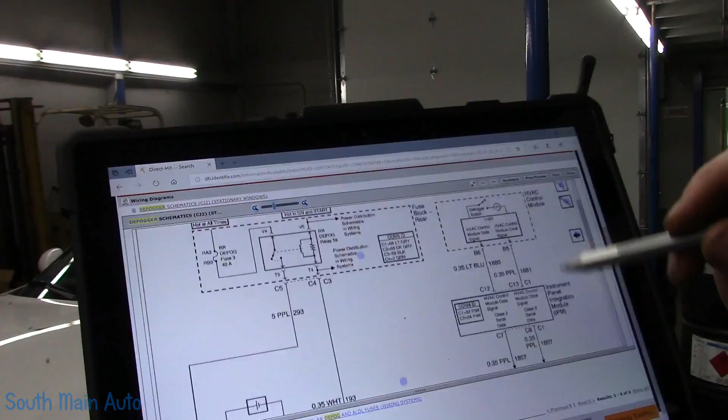So looking on a diagram here, hopefully I can share this with you folks. I decided let's just look at the rear defogger, just because that's what I said. So we have a rear defogger relay, we have a fuse—just trying to get an idea where we're going to go with it. And of course this is the rear defogger grid back here.

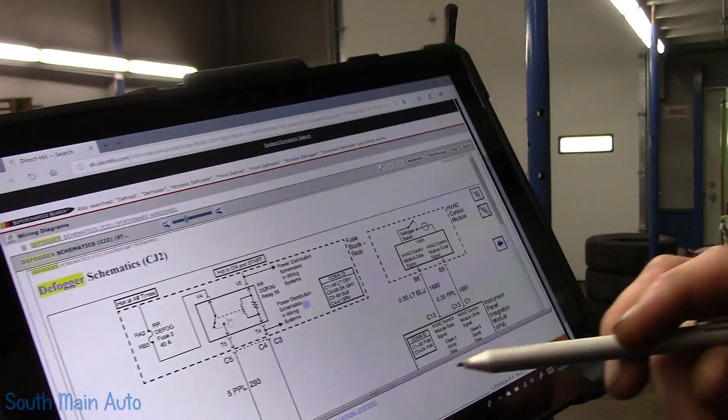Needless to say, in order to turn this relay on—because I doubt we're going to find a fuse problem, since I doubt all these run off the same fuse—that's just something going in my gut right now, just trying to get an idea. In order to turn that on, it's turned on by the rear integration module, or the RIM.

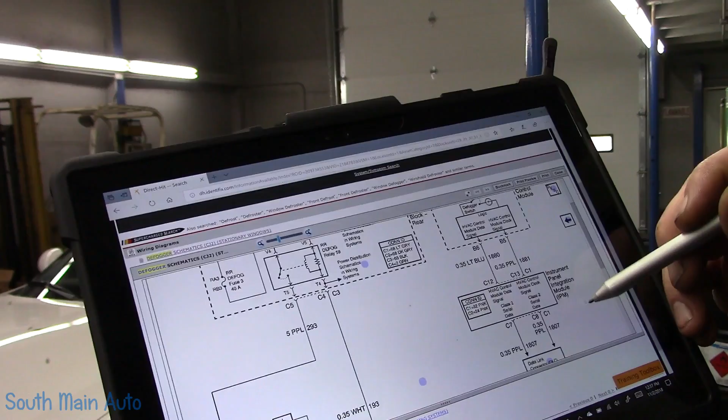So let's start at the beginning. We push the button here on the rear window defogger, and that sends a signal to the instrument panel integration module, and from there it sends a signal to the rear integration module, and then the rear integration module turns on the relay, and well, the rest is history.

So being that works off a module, I say we take and grab a scan tool real quick—see, because it looks like we might need some data, see if it's even receiving that input, and then we'll do all the rest of our checks here. Wait for the scan tool to boot up here.

Wait for that dinger to quit dinging. Quit dinging, you ding dong! Oh, there it goes—let's close up there.

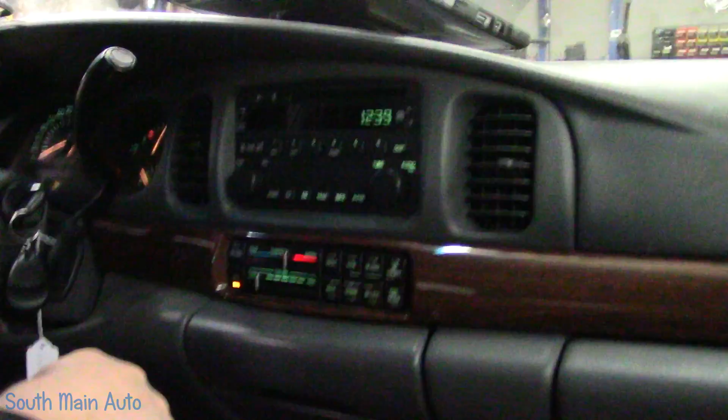Mrs. O's making some noise in there. So the power windows work—let me get them up. Ooh, that didn't sound good. So that's the lock/unlock button over here—nothing's happening. No interior lights up there. And I do not hear any clicking, but I also notice it does not light up either.

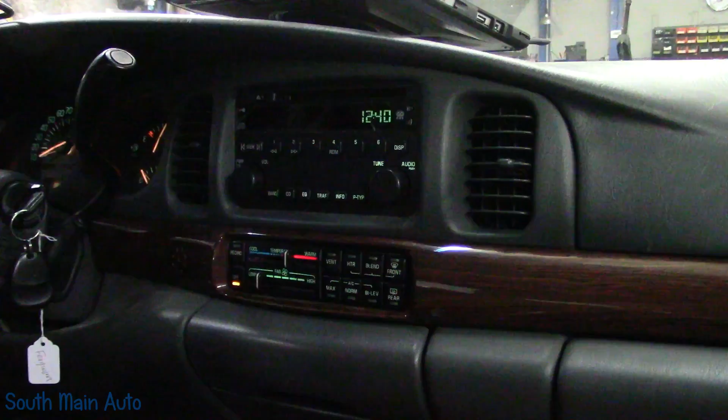So let's get the scan tool loaded, see if we can talk to this RIM, see if we can see any type of input, and then chase it down from that area.

So currently I'm just pulling codes from all modules, because let's say we have a no-com with something—modules will tell on other modules, so it's always a good idea to do. So I'll let this finish, let this populate.

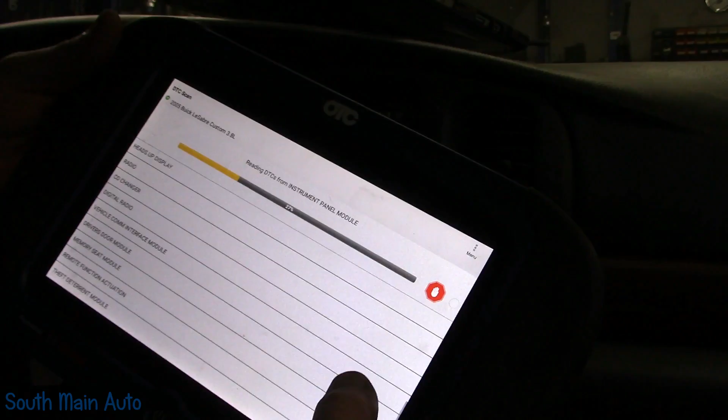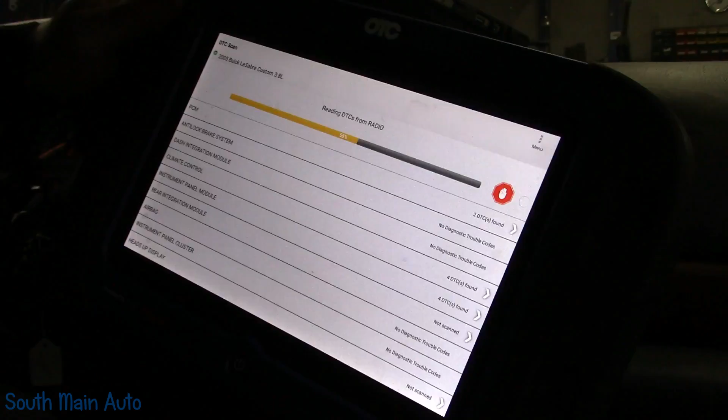So there are codes in the climate control module, so that's good. So, rear integration module—oh, you see that? Not scanned. I think that's code word for no-com. So that's pretty interesting. I wonder if all those other components that don't work also run off that module. I think that's on my list.

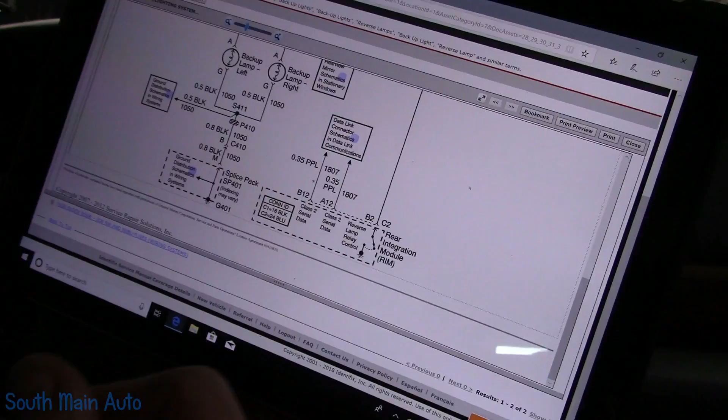Guess what? The reverse light control for the reverse light relay also runs off the rear integration module. Alright, so it's all starting to make sense now. What else did he have? We had interior lights, right?

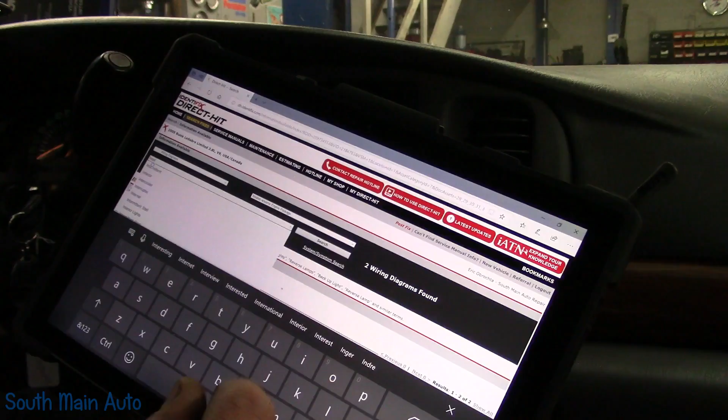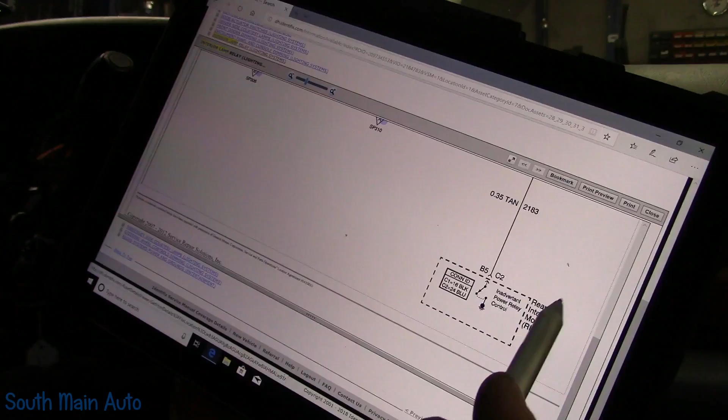Interior, I-O-R, interior lights. Hey, look at that. So let's just see what these little guys run off. If they're all the same, then we're going to change our interior lamp relay lighting system. Here we go, inadvertent power relay. Rear integration module. We're starting to see the connection now.

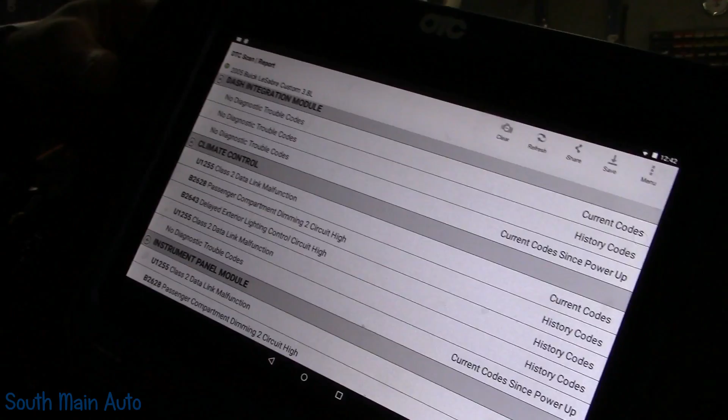I bet if we look up everything else, we will also find... Let's see here, we got some old history codes in the ECM. Current code, Class 2 data link malfunction. That is in the climate control. I wonder if that code sets if it cannot communicate with the rear integration module.

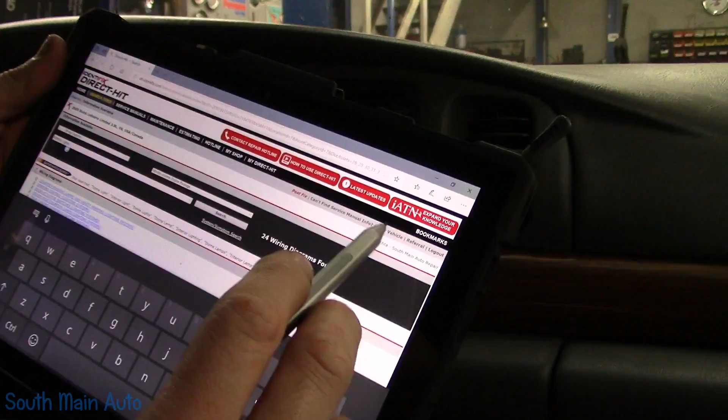I assume it had Class 2 data lines going to it. This is an old enough GM. Let's see here, where were we? Actually, I saved it in my bookmarks. Let me open this back up. Come on, bookmarks. Loading, defogger schematic. Let's see.

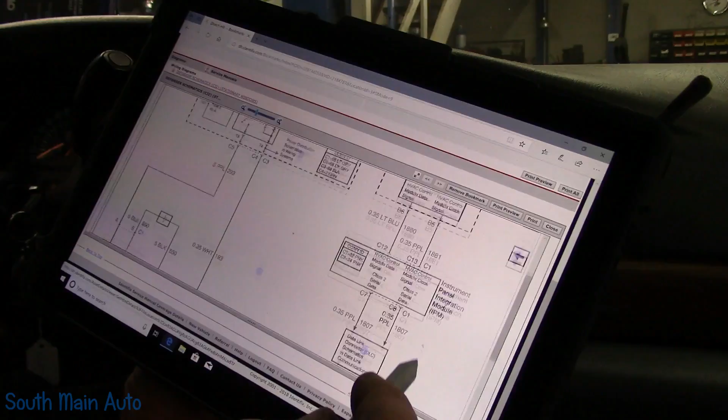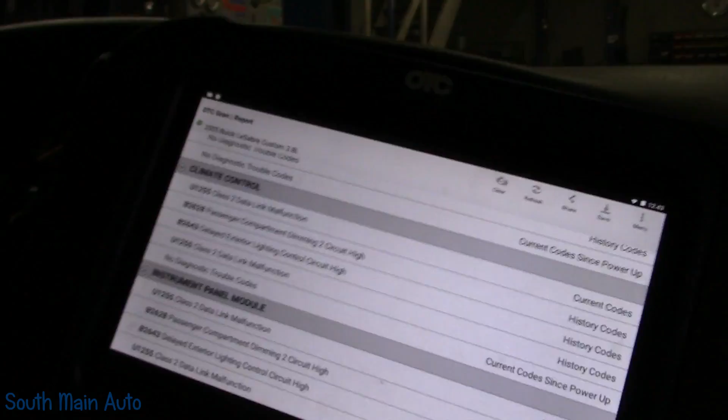It actually has two Class 2 serial data lines going to it from the HVAC module. So that's good to know. Instrument panel also has a Class 2 data line malfunction. And if we remember looking on our diagram here, it goes from the HVAC module, so from this button here, it goes to the instrument cluster, and then, right, is that what it said? No, I'm sorry, instrument panel integration module, and then to the rear integration module.

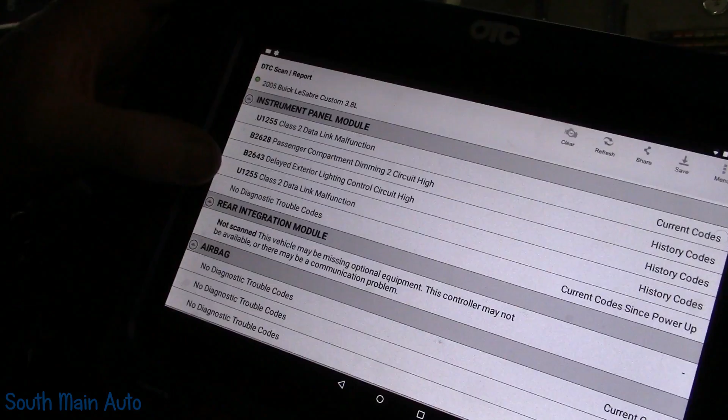So both of those modules that this button communicates with have Class 2 data malfunctions in them. Rear integration module, this vehicle may be missing optional equipment, which we know this vehicle is supposed to have. And then instrument panel, nothing. I may have misstated that. And so driver's door module.

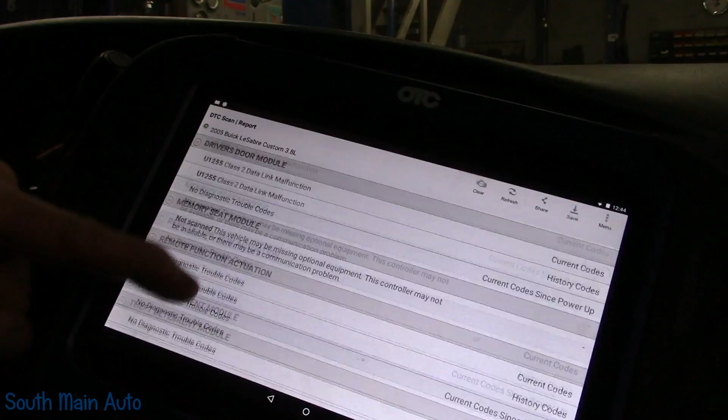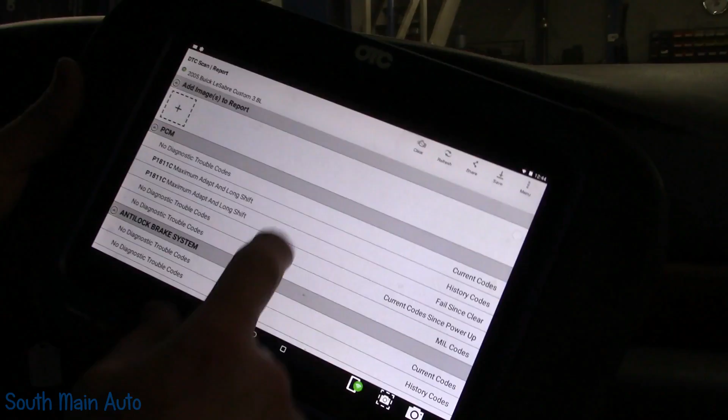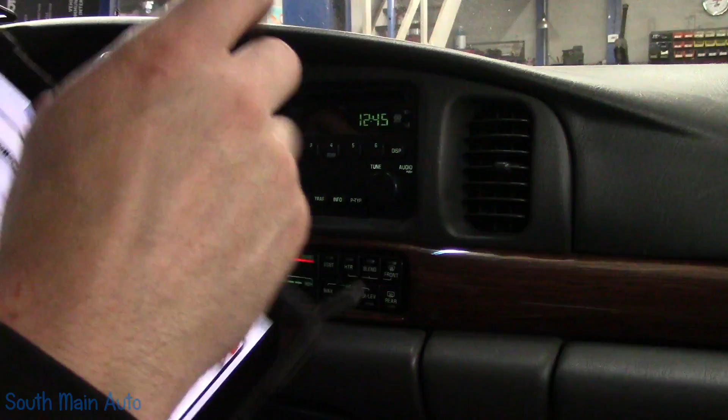Okay, so let's change our plan a little bit here. Now that we've gathered a little bit of data, I believe I may have stated that incorrectly. Let's see, yeah, instrument panel integration module. Instrument panel module. Okay, alright, change of plan. Let's find out where the old RIM lives, see if it has powers and grounds. Perhaps it is a blown fuse. So let's find this little guy.

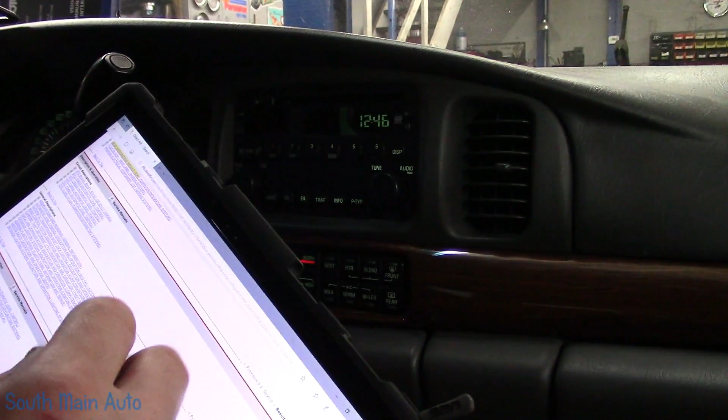So I did some poking. I found a picture, and it looks like two connectors. I don't know if that's the trunk. Looks like possibly the rear door opening in the trunk. I'll do some poking here, see if I can find some wordage. I didn't find any verbiage. I did find it on a color diagram though.

Just want to see this thing runs heated seat, all kinds of body functions. Rear integration module, behind upper left rear seat cushion. Okay, so that's good to know. Grounds in the lower left side of the trunk. Controls rear defoggers, controls reverse lights, interior lamp control.

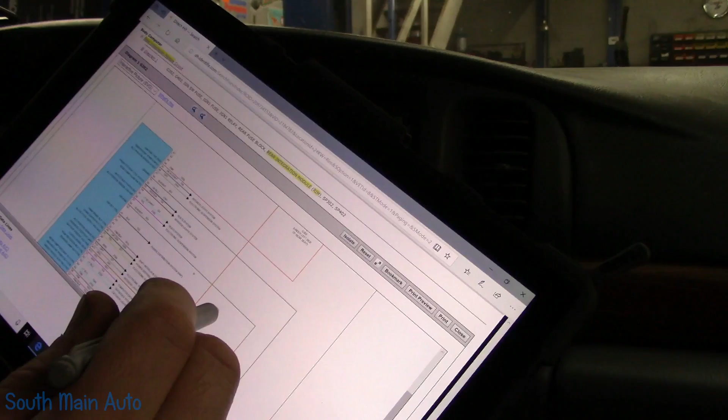Alright, heated seats if it had it. Rear compartment ajar switch. Okay, cigarette lighter relay. Alright, so this all makes sense to us. Let's find this little guy, see what we're missing. Powers, grounds, maybe shorted Class 2. I don't know, maybe a blown fuse.

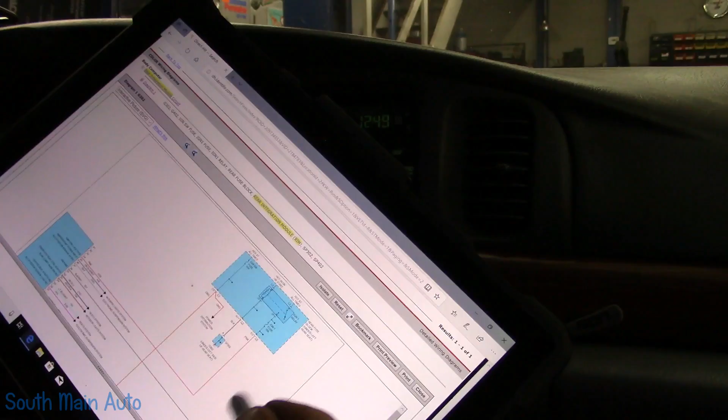So let's get to the fuse box. What's this, rear fuse box under the seat. Let's just check a couple little simple things here real quick first before we get too carried away. Get a pin here. Oh, come on, little fella. Oh, son of a monkey there. Let me get the other side loose. Yeah, alright, let's pull that out.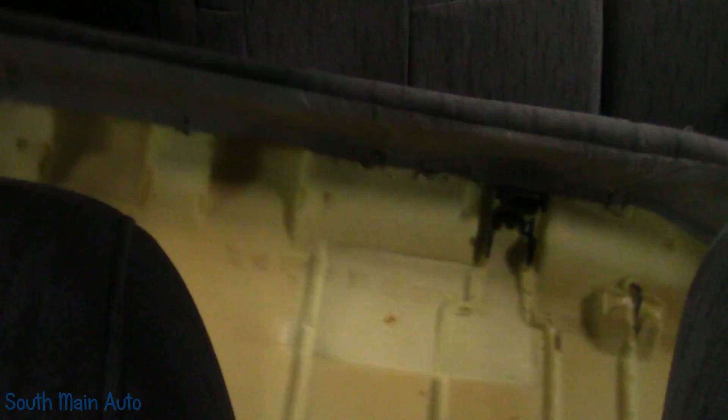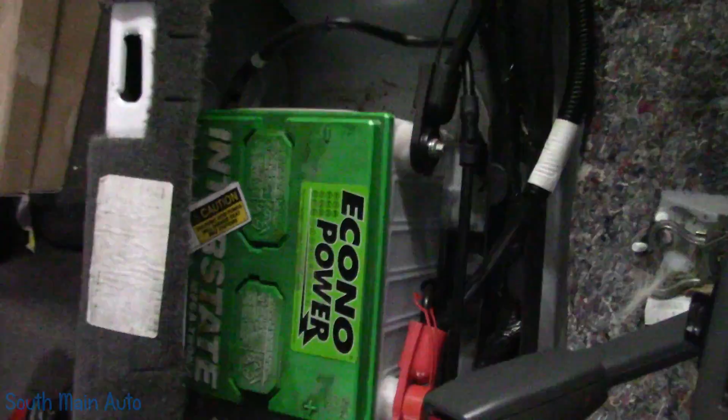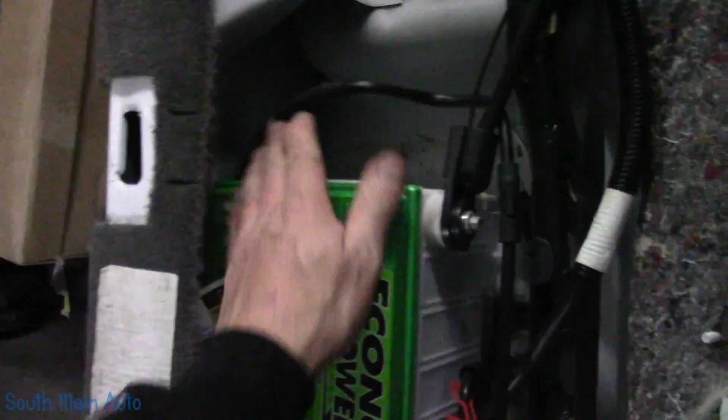It's got the wrong battery in it. That's one thing, it doesn't matter, but okay. Well, there's our fuse box. Let's make sure our fuse is good. Go from there, so I don't have to answer 100 questions in the comment box. Why does it have the wrong battery in it? This battery is actually, it's correct in the sense it's side post, but it is not vented outside the car. You can see somebody left the vent hoses off from it right here. It's supposed to be able to hook to the sides of the battery. They just kind of did whatever they did with them. So this battery is actually gassing inside the car, which can be dangerous.

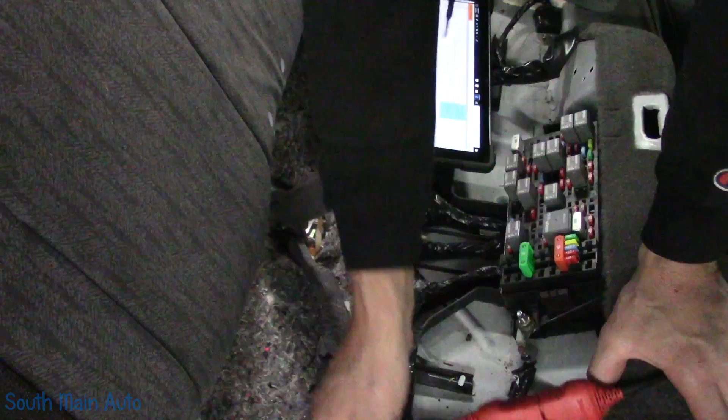Let's see, I got the old power probe. Had this baby out doing something else, so we'll just use that. Get our cover off here. You guys remember we did a video on a Buick where, what do you have to do, like I think it was cut the seat bracket or something, because it pushes on the fuel pump relay and causes problems.

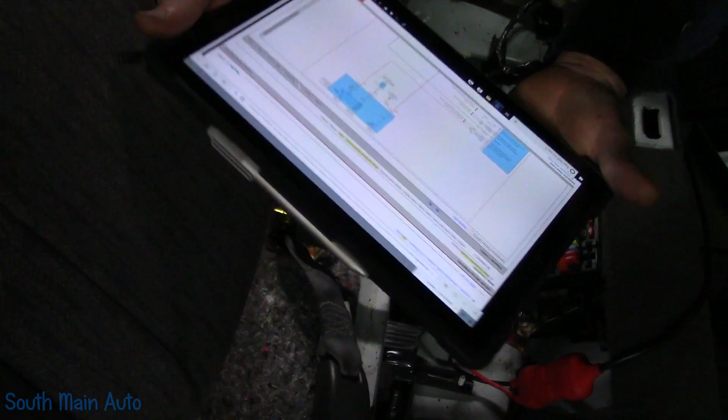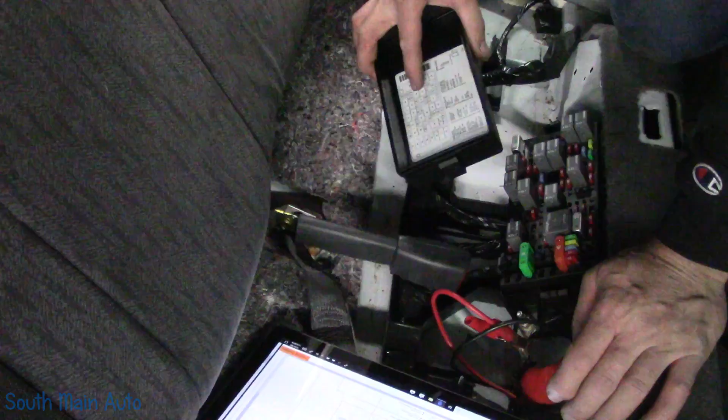Okie dokie, let's see what do we have here. Ignition switch fuse, 15 amp. Let's find that on our chart here. The ignition 1, no ignition switch it says, so we gotta find IGN SW number 29, and these are no sequential order. There's 29 right there, which is, survey says, 15 amp right there.

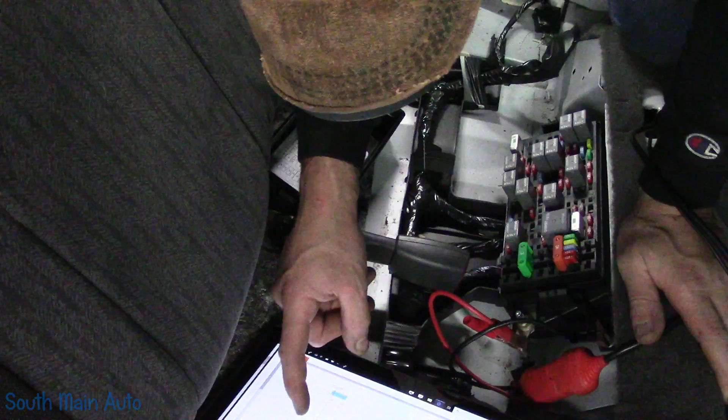Alright, so we got power on both sides. I'm just going to look at a diagram here. That is the power supply for the RIM. So our fuse is good, we do know that. It also receives power from ignition 1 relay.

So let's find ignition 1 relay. Micro relays, circuit breakers, mini fuses. Ignition 1 micro relay, number 41. And that lives right here.

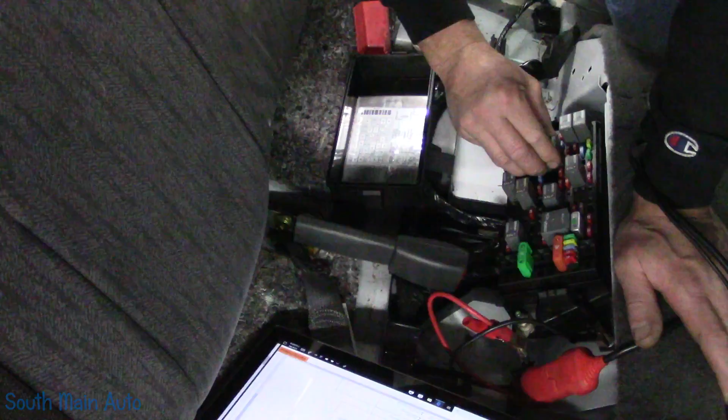So let's see if this little guy's clicking. It is not clicking. Well, is that number 41? It is not number 41. This is number 41.

Okay, that's clicking. Does clicking mean it's good? No, it does not. So let's see where the load side is here. 30 and 87.

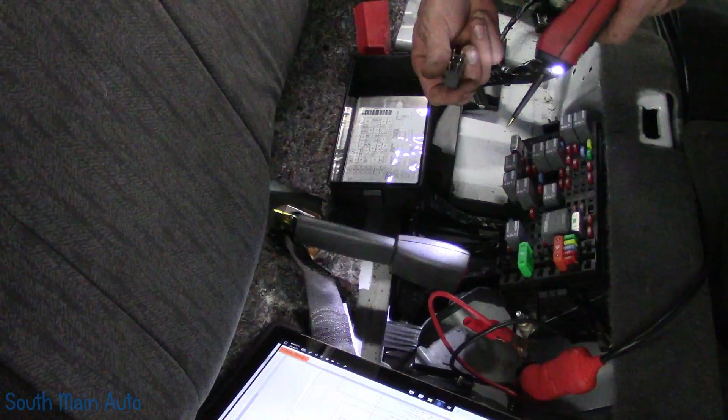Uh-oh. I imagine that's not good because we probably just set a whole bunch of codes. 30, because I heard it ding. 30 should be hot. 30's hot. Number 87 should be this one.

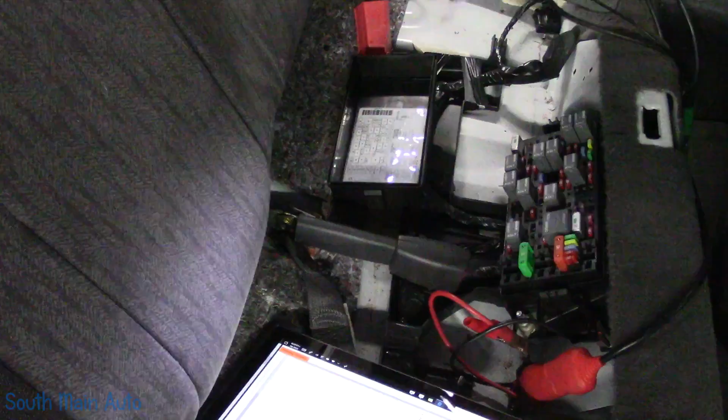Okay, our relay is good. Of course, we probably just set a bunch of codes because you guys heard the dinger ding. So our relay is good. Our switch fused, our fuse is good.

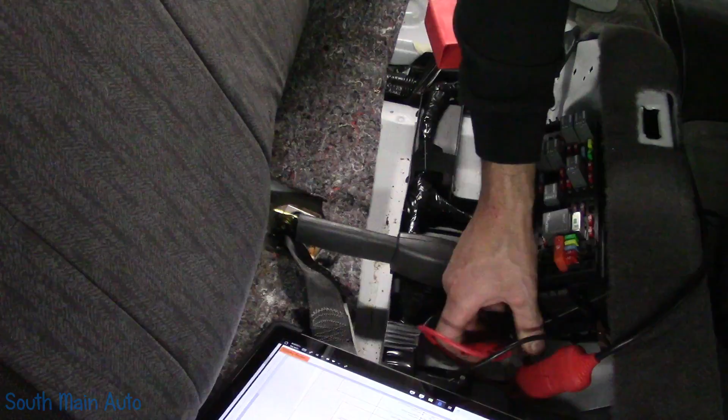Actually, we'll leave that hooked up because we might need it. I wonder if we can get into the trunk. Hopefully the key works. And what I love about Buick. You can actually fit in the trunk quite comfortably.

Here's the old rimmer. So there she is. There was a plastic shield over this that was actually magnetic. It was kind of neat. Pulled that off. Got a computer back here.

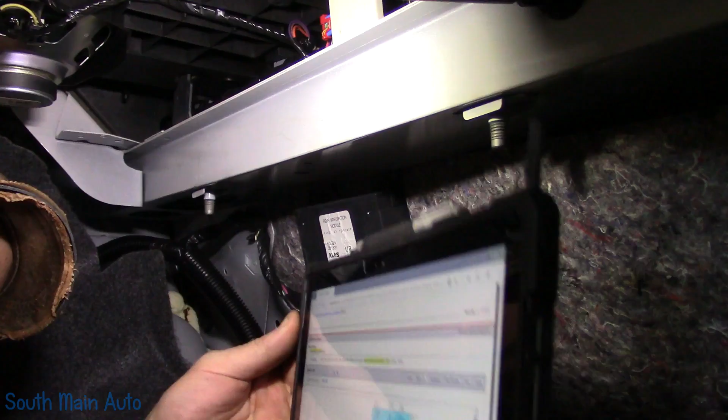So we are going to find who's who. We got two choices of connectors, C1 and C2. It appears C2 has more wires, so we'll assume it's this one. We'll unplug it. Actually, we'll just unplug both of them for a quick visual.

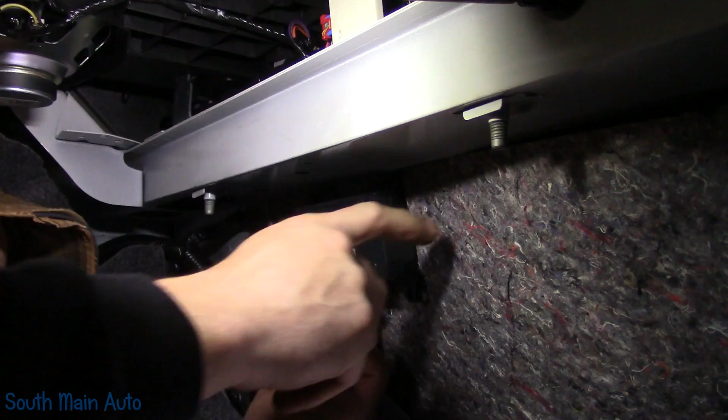I assume we got to pull the seat back to pull this. Nothing looks green or crusty. And then it looks like our orange wire. Orange wire is power. That's the one we checked at the fuse, so let's just check it back here.

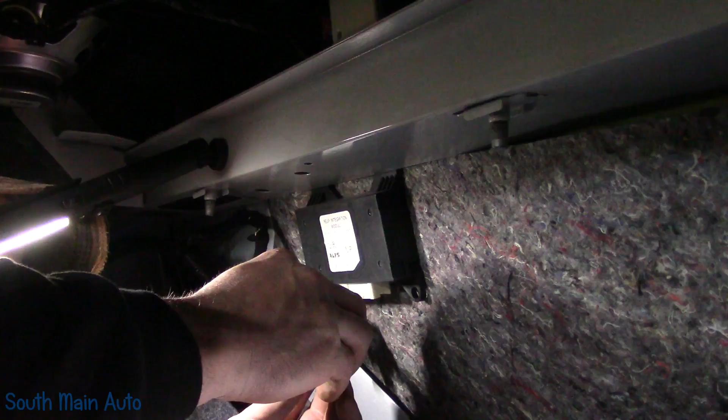Where are you hiding there, little fella? Second one over on that row. So it should be this little guy right in here. Let's see, 1, 2.

Alright, and then our pink wire was one that ran from the relay. And that goes into the other connector. And that is pin number 4. 1, 2, 3, 4. Alright, so we have power on both of them.

Our ground is black with a white stripe in this harness. How come I got two black with whites? Two black with whites. Oh, okay, both of the grounds go into connector C1. They're on top of each other. That one. Oops.

Can they carry current? Yep, enough current to blow a circuit breaker. Okay, so they carry current. Come on, stop it. There you go.

So the only thing we have to check for now - we have power, we have ground, we have no communication, so we need to see if we have data. Let me just make sure it doesn't have some kind of wake up signal back here. I don't believe it does. Heat seats, grounds, retaining accessory power control.

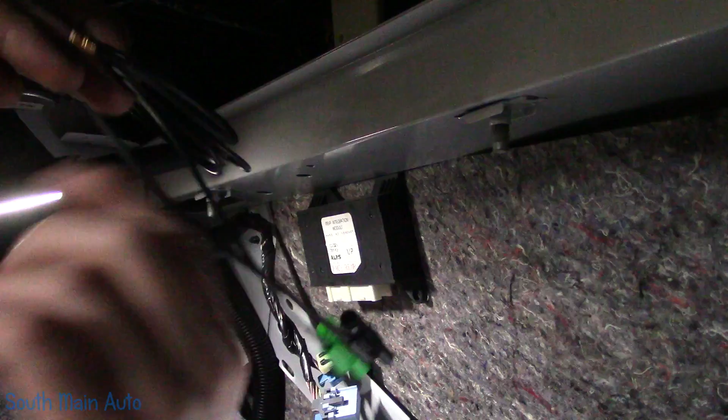Alright, look at that. So we have some leads. Let's plug it in. Make sure the little guy turns on here. Well, that's fun. So that turns on.

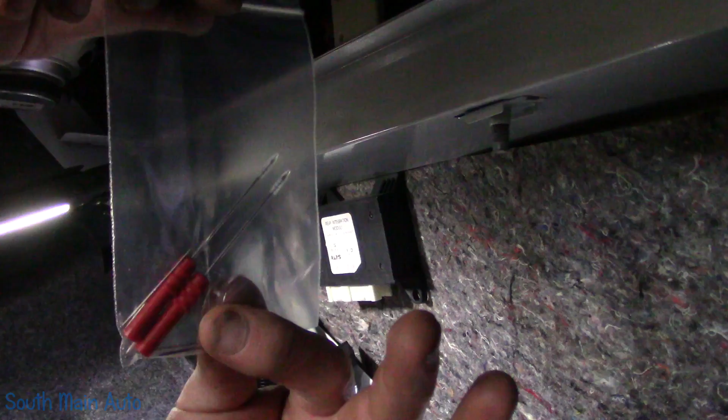Alright, let me see what we got for probes. Hopefully I don't have to get back out of the trunk. If we do, we'll scream for Mrs. O. Okay, we got a couple. It comes with some needle probes here, which should do us just fine for what we're doing.

We'll just be very ginger, of course. Stick them down. We're going to get one here. So we want a ground, which we know is in this connector - black with white stripes, so we'll just lightly stick that in there. We'll stick this one here, and this is going to be for our class 2 data, which is in this connector. That's the purple wire.

Hey, look at that. That's fancy. I haven't even done any setups yet. Let me just change the time on the screen here. Oh, wrong way, fella.

I don't know how to move the trigger just yet, but we should have a 0 to 7 volt square wave of data communications. And it appears that we do. We got to bring up a cursor here. I want to make sure, we're at 0 and we're at 2 volts per division, so 2, 4, 6 - that is 7 volts because we're at 2 volts per division.

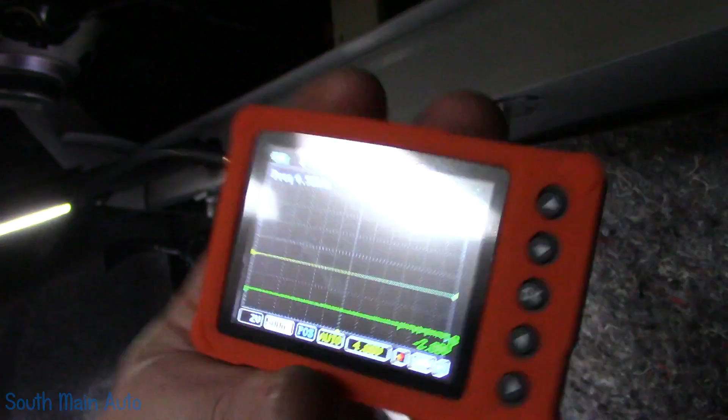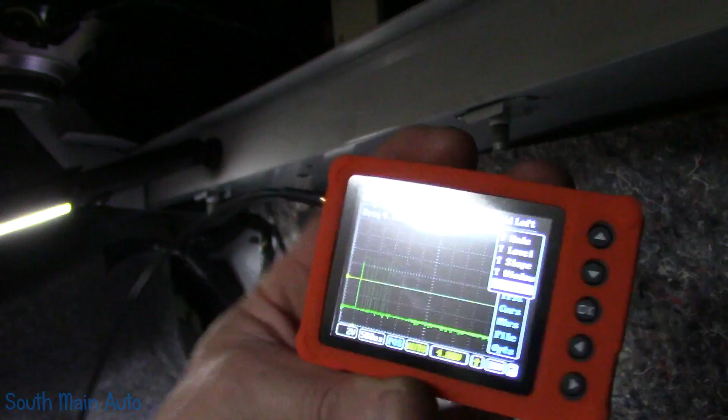Let's just see if we can bring up a cursor. Bear with me here, folks. Trigger - we want to move our trigger position. There we go, we moved our trigger over to the left, so now we get a little more data on the screen. Now what were we doing? Oh, a cursor. What do we want? We want a voltage cursor.

Son of a gun, sorry folks. I don't really know what I'm doing here. Cursors, okay, or voltage - we want to turn that on. Now we want to move it. Chug it, chug it, chug it. It's moving, see, I'm moving my cursor down. Come on down, it's like the Price is Right.

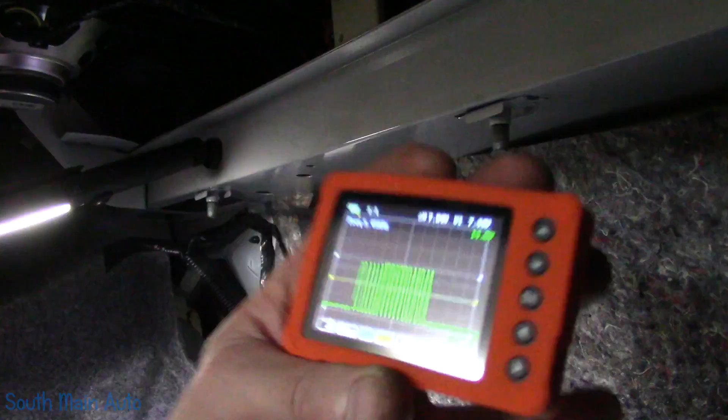And our cursor is at 7.00 volts, so close enough. We are going from 0 to 7. That's a lot of data up on the screen.

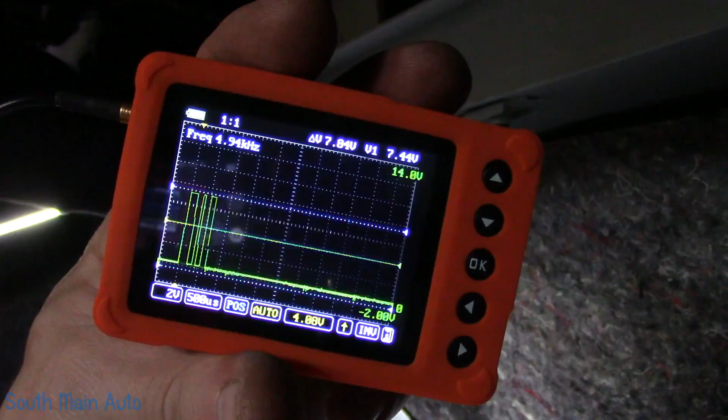So let's check our other - I'll try to hold this. We'll check our other purple wire here. Oops, shorted it to ground. That won't hurt anything though, don't worry about it, I'll just hold it. And we can see we have class 2 data on that wire also.

Oops, oops, she does not. Yeah, well, that tells us our network's good because I just shorted it to ground, which doesn't do anything. No harm, fellas, don't worry about it. Let's plug her back in.

Let's make sure we got data with it plugged in. This is looking kind of - let me just hold the ground for it. Oops, sorry, bent my needle. And I swore at you. So with the module still plugged in, we have nothing because my wire fell out. I suck at this. I just want to make sure this module wasn't getting pulled down, which it shouldn't, because I think it would bring other modules off the network if it was, but it's just good habit to get into. Let me see if I can hold that for you.

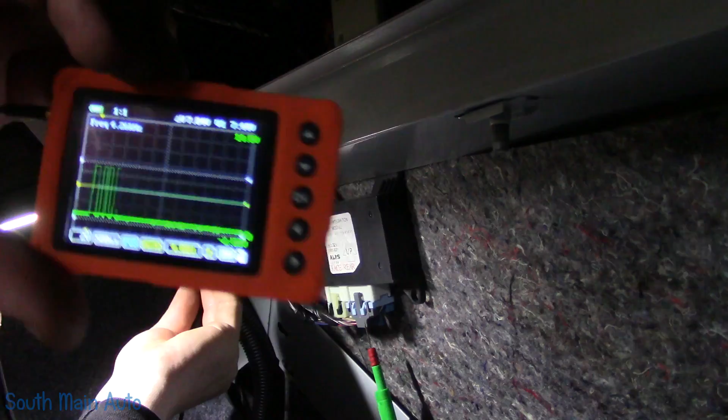All right, so we have data plugged in, we have power, we have ground, but nothing's working. That means the rim module is bad. Is that right? What do you think? So I just want to make sure I'm covering all my bases here.

I want to see - it looks like this module is in control of mostly outputs. It receives data over the class 2 network to say turn this on, turn that on, and it essentially does just that. It has a lot of relay controls where it turns on relays to turn on lights, reverse lights, the cigarette lighter, to do all that stuff. The heated seats - I just want to make sure I'm not missing anything, because if it had certain inputs, I don't think that would mess it up either.

I do see, though, it has a 5-volt reference, ALC. I believe that is for the air suspension, and that has a 5-volt reference. Now, I do not know if that 5-volt reference were to be pulled down, if that would screw that up. I don't even know if this thing has air suspension on it, but that is a good thing that we should check just to see. Now, if the 5-volt reference is down, that could be either because we have a bad module or because it's being pulled down. So that is something to look at.

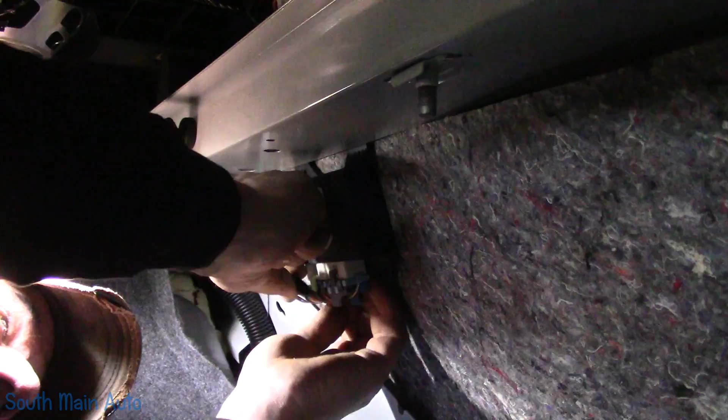So I'm wondering - I do not know personally if a 5-volt reference on one of these will, if it was pulled down, let me make sure I'm checking the right wire again - if it was pulled down, will that kill communications to this module? Or is it just missing 5 volts because of the fact the module itself is dead? That is the age-old question. How can we answer it?

Well, we could depin it here real quick, I guess. As long as I don't stab myself right through the finger.

Oh yeah, now we're talking. So it is right next to the blue with white. Don't anybody forget that, that's where that wire goes. Next to blue and white.

How the heck do you depin it? I can't see the little flipper thing. It's not on the front side, right? Nope. I think I got it.

What's up, Miss O? You wanna go on the trunk here with me, the pretty girl? It looks like you're taking up most of it. Yeah, we can cuddle, that's about it. Oh no, you doubt my abilities there, woman.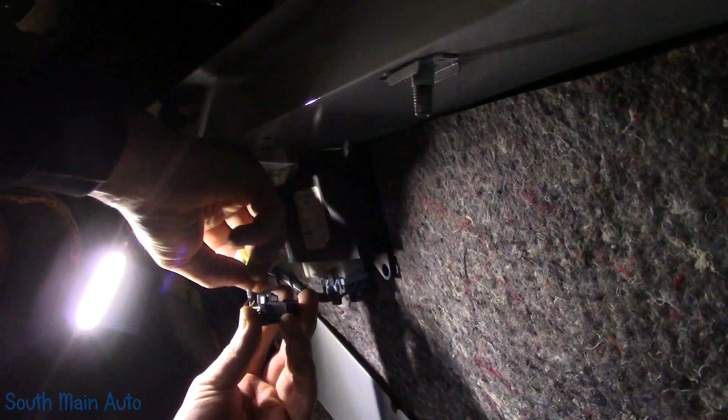Alright, I'm giving up. Let's find the other end of this thing. We might have to go underneath the car. I don't want to destroy the connector. I'm flicking the little flicker, but I can't get it to unflick. Is that technical?

So let's put this back on. Well, usually those aren't too difficult, but apparently...

I've never been on live television before. If it was me and I wasn't making a video, I'd just cut the wire about 4 inches up. But what's up, you have a customer on the phone and a customer in the office.

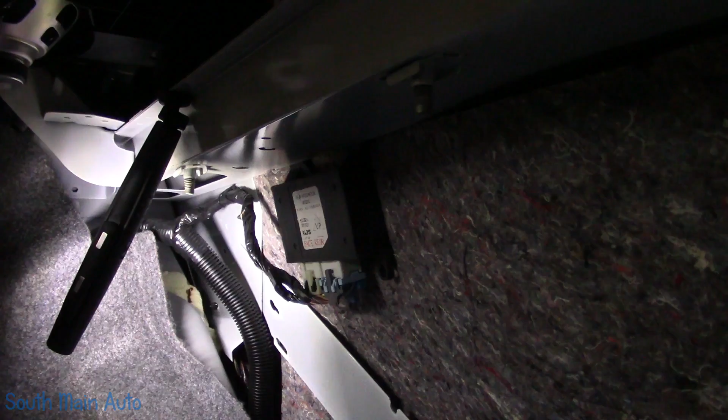I give up, Vanessa, no. I can't even fix a freaking car because of people. Who is it? Is it the air filter lady? It's the take-you-for-a-drive-to-listen-to-the-noise person. Son of a monkey. Alright, we'll be back in 20 minutes, folks.

We are back, and I won. I got it out, just had to walk away for a minute. I had to find the right flicker to give it the flick.

So now we'll plug it back in and see if communications have since been restored. Shouldn't be anything on that. Still the 0.02 volts.

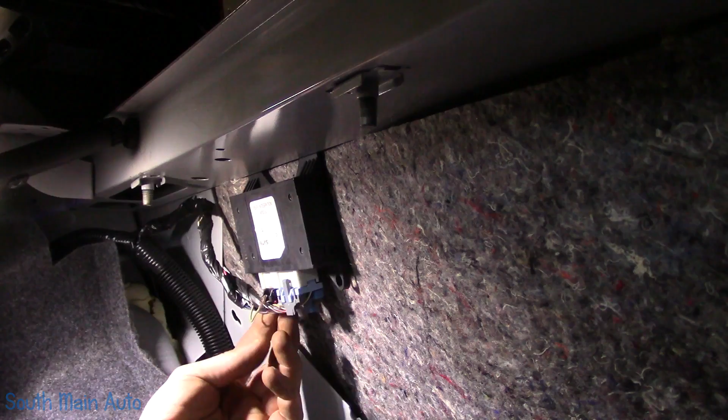Okay, let's go see. We'll just take and cycle the key for what it's worth. Still nothing there, still nothing there.

Just for poop and laughter, it's kind of odd that this would have all quit at the same time. What do we want? We want the rear integration module.

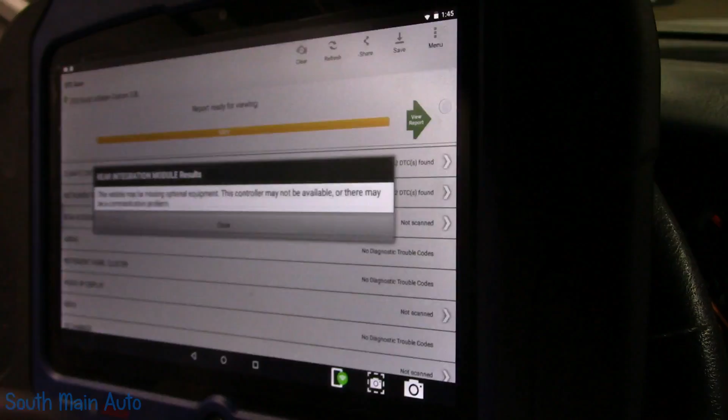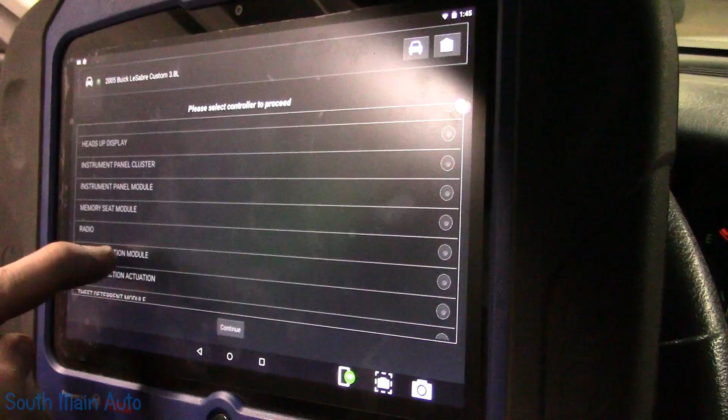Well, let me back out of here, because clearly I don't know what I'm doing. Rear integration module, continue. It should come up with a no comm yet. So, error, no communications. So that did not work.

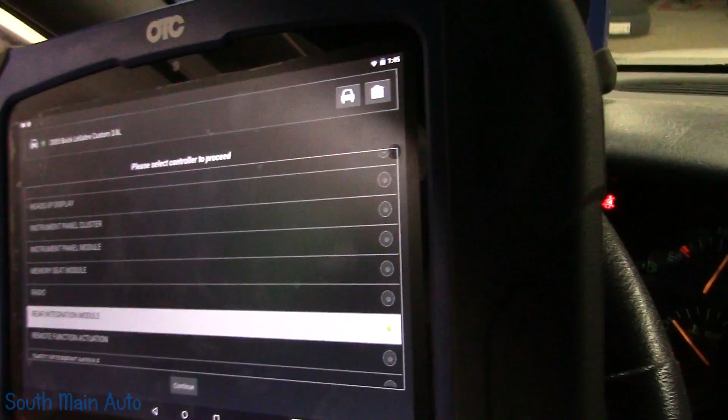The only last-ditch effort we could do is just unhook the battery, make sure it's not some kind of logic problem, and then make the call.

Alright folks, that's it. I did the battery disconnect, let it sit for quite a while. I had to do some other stuff, come back, hooked it up. Of course, everything is still not functioning. We've done what we could do.

It has power, it has ground, it has the ability to communicate, and the 5-volt reference that it feeds out to the suspension level sensor is not shorted. It needs a module, simple as that.

Was it caused by the other shop changing the coolant elbows? I don't know, I don't see any reason why it would be. So we'll just leave that alone, tell the guy what's wrong with it, and keep on trucking.

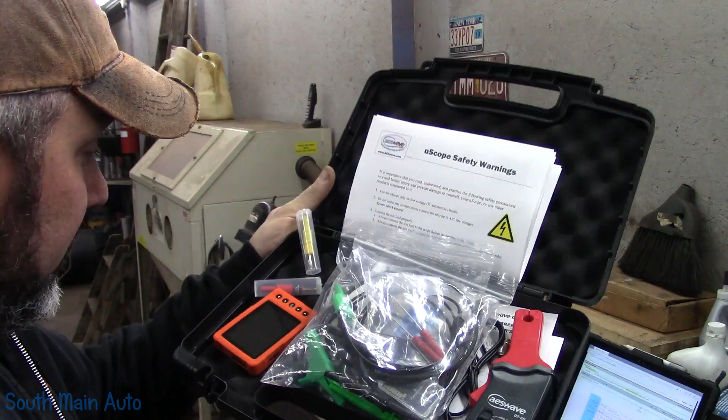If you guys are going to ask questions, this is the AESwave uScope Master Kit. So yeah, we've got the amp clamp, comes with an amp clamp, comes with all the leads and everything I use, a couple of the little probes.

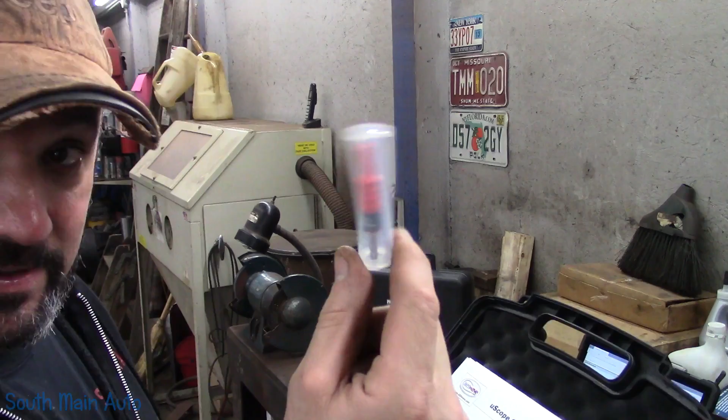It comes with an ignition probe, a little ignition paddle for coil and plug ignition, a bunch of other little things, a 10-to-1 attenuator. Comes with an AC filter, so if you want to AC couple it, you just plug this little guy in.

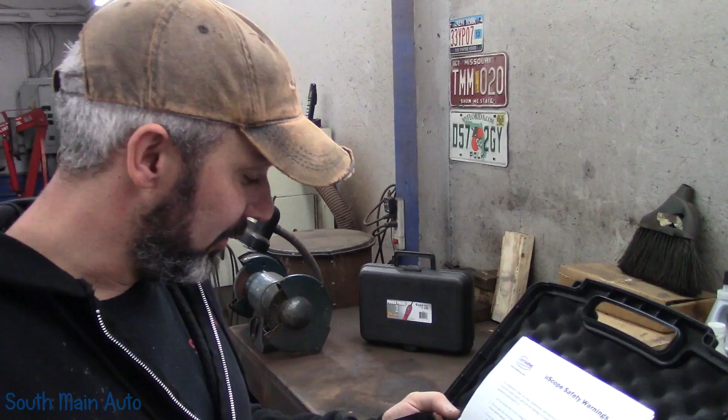You'll have to use the attenuator because I think the scope's only good up to 80 volts by itself. So if you're doing primary ignition, you're going to want an attenuator. Otherwise, you will let the smoke out of it, and that wouldn't be good.